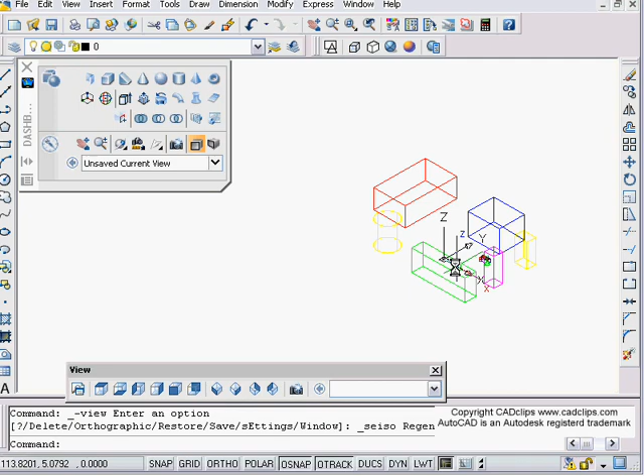I've just got some prop objects in here as I usually do. I'm going to switch over to conceptual view, for instance, and cameras are pretty easy. You just drop them in and look. The thing about a camera is it has a camera height and a target height, and then basically it looks in that direction, and we have clipping planes which we can turn on and off with our cameras.

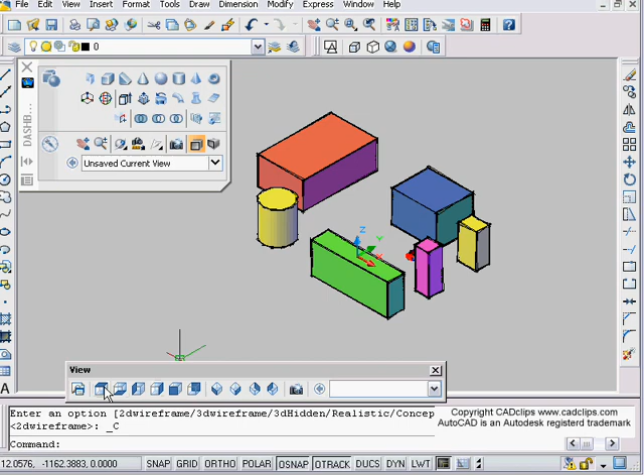I usually find setting myself to a plan view... oh, I've got a camera in there, I'm going to delete that. And I find, place them in a plan view to start with.

So I'm going to go in here and simply say camera. You'll notice that some of these have flyouts too here on the way. Camera. And then it says, okay, specify camera location. Notice that when you place the camera, it always looks back towards 0, 0.

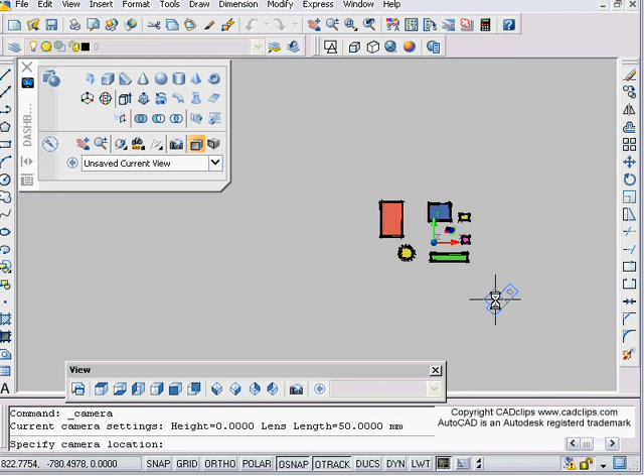You'll notice as I move this around, I'm going to move everything over to there. Okay, now my 0, 0 is here. Watch, when I place my camera, even though I'm going around these objects, it's always trying to look back at 0, 0, which isn't a big problem.

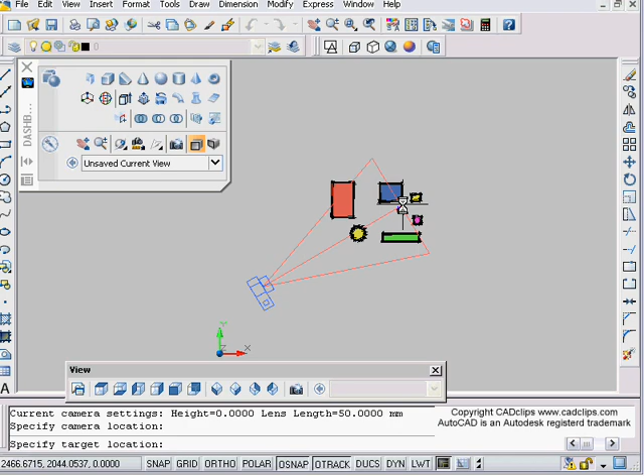Because we can still go over here and place our camera, and then we place the target. Now you have to be careful because when you use your object snaps, it'll pick up those endpoints and stuff like that. So be cognizant that it is picking up object snaps. So I'm going to just pick a point out here.

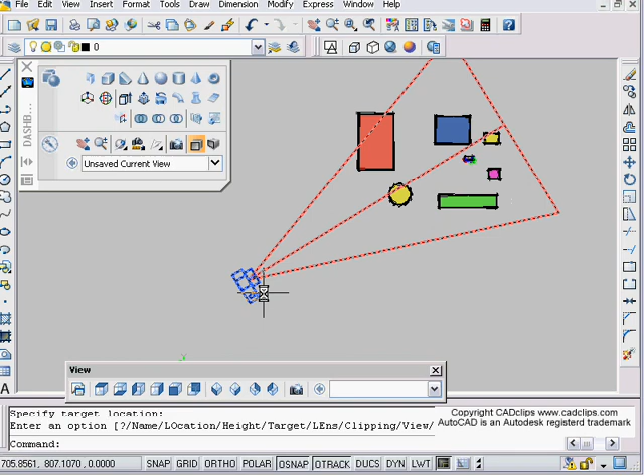And then it's going to leave me with some options inside of there, clipping planes, etc. And then I'm just going to hit enter. Now I have that camera on there, and down in here, if I hit this expand button down in here...

See some great stuff for recording animations and stuff. I can turn basically camera display on or off. So if I create a couple of different cameras around here...

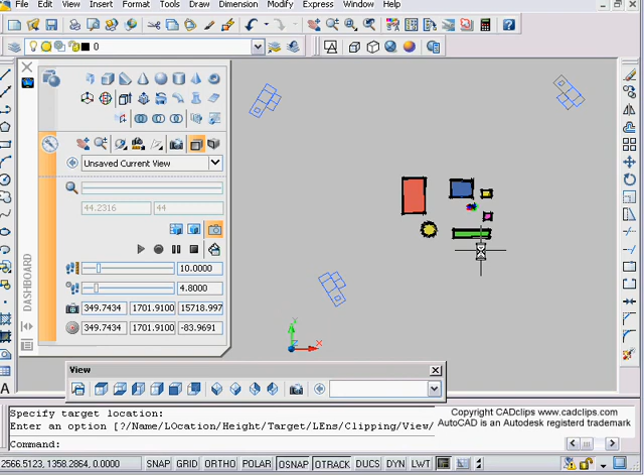Okay, I can turn those cameras on and off. Then I can click on the camera and it shows me a preview, and I can have that show or not show in there, and I can also pick my display visual style that I want in there.

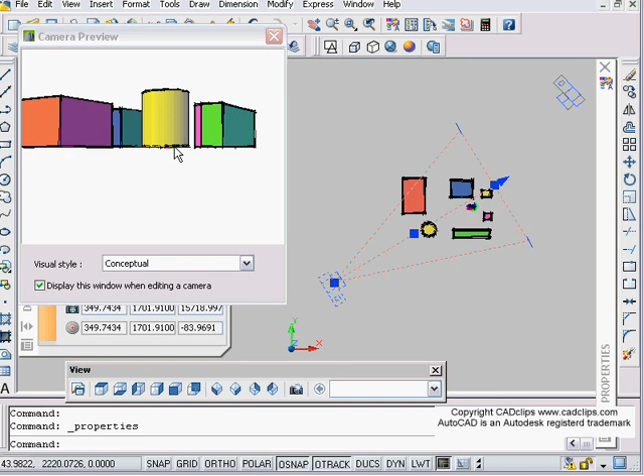The other thing is as you place cameras, it's creating views with names. You can click on a camera and check the properties of it, and it says, okay, this is camera 1. Now notice the camera Z and the target Z. That's why you're always kind of looking down at the ground.

So the first thing I usually do with a camera is click on it and check the properties, and I usually bump up, like maybe I'll take the target Z and put it at 10 units high, and you'll have to know what units are relative.

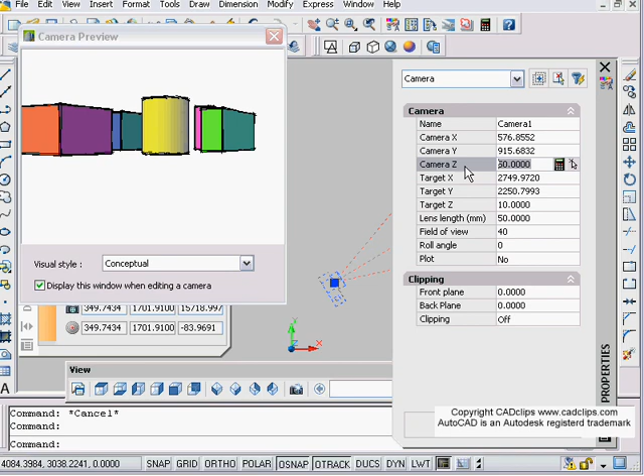And my camera I'm going to put at maybe 50 units high, which kind of raises it up, and you can see the preview. So I'm going to go back and maybe I'll make that 500 units. You'll see that that angle changes.

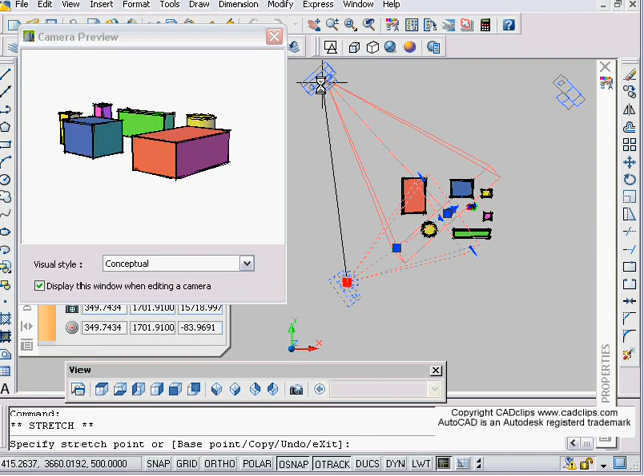Now as I go in here, I can click on this, and you can see the preview happening in the bird's eye. Well, maybe I want to bring that target there, and then I can work my way around the objects over here, and you can see that quite nicely.

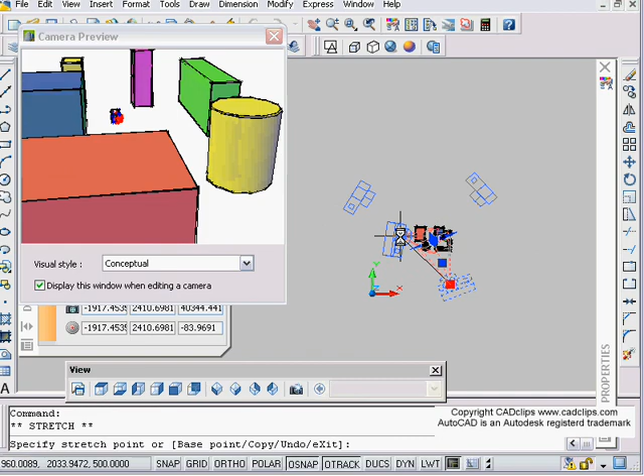You can get right inside, and depending on where your target is, depends on what you'll see when you get inside there. Hit it, and then I can even hit escape, do a regen, and then maybe zoom out and then click on here, and depending on how far you're zoomed out or zoomed in, you can have that picture in picture.

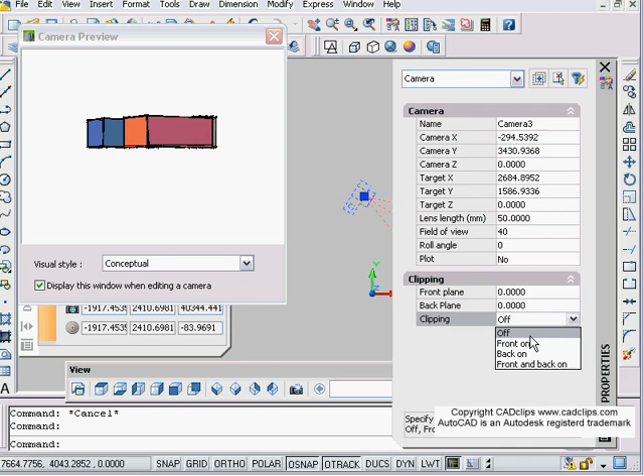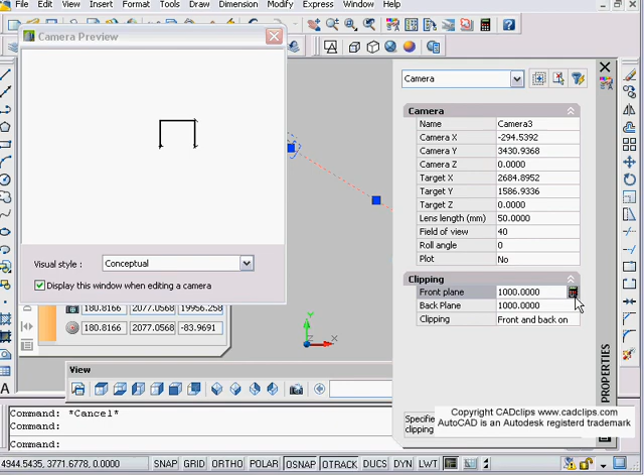So what happens there is we can click on that camera now, and we can set those clipping planes to be a certain distance away, by adding in some numbers, 500 and 1000. It'll capture part of that. You can go in and use your calculator as well. So you can add those clipping planes, a front clipping plane is the front one, and the back clipping plane is the back.

You can control those through the properties or with grips if clipping is actually turned on. Most times clipping is turned off, so it's kind of ignored.

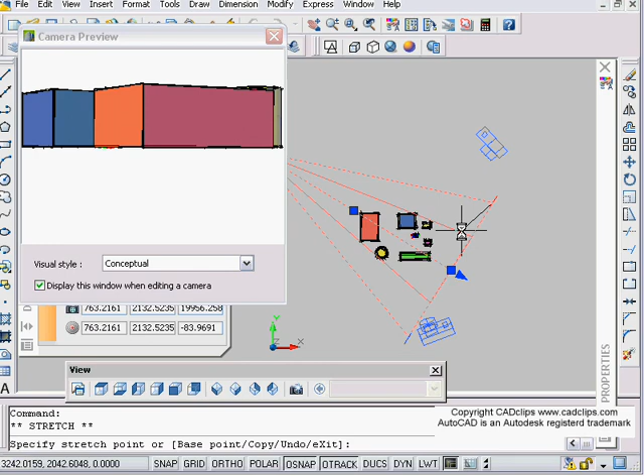Okay, we also have some grips over here. Lens length, if you want to narrow the scope of your lens as you're moving that around with your camera. Notice how this one still has a camera height of 0.

Let's change that to be 500 again. Let's make it 1,000 units high. Now I can move that around, etc.

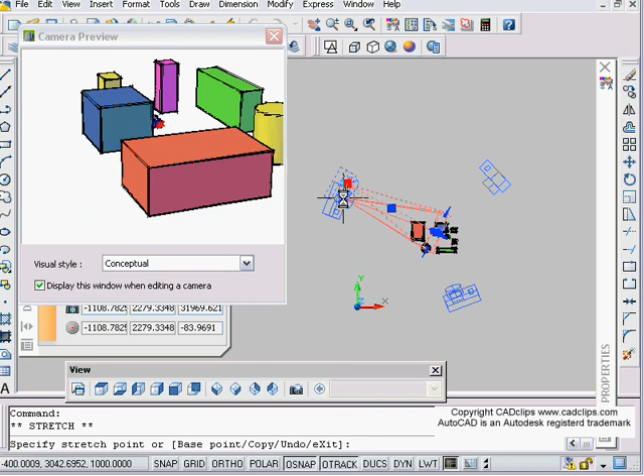And those cameras also show up if you look in these type of views. You can see that camera again. You can kind of move that around, do stuff with it. The square grip actually moves the camera.

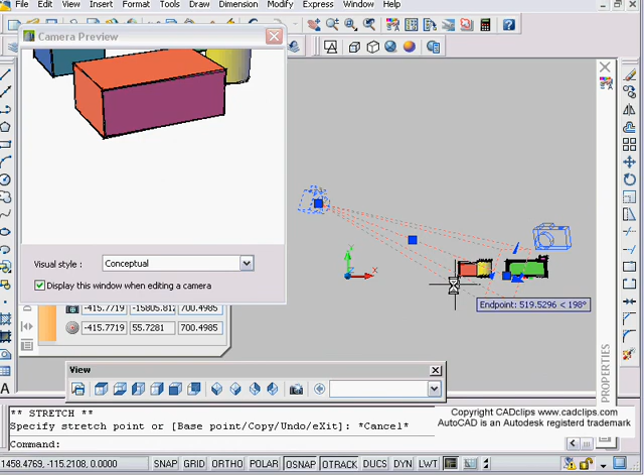These change the lens size by going in and out this way, and then this moves the target, the actual target. So get used to the different grips, and as you change your viewpoints here, you'll be able to see those cameras if they're actually turned on.

So the idea is to get one of your cameras, and if we right click on that, we can say set camera view, and then it'll actually go to that view, and you don't maybe need this guy over here anymore.

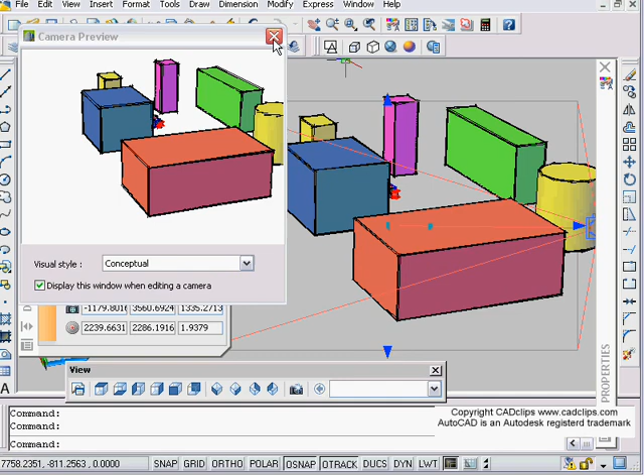And when you do that, you can then go in and pick on these points again and change those options for that particular camera.

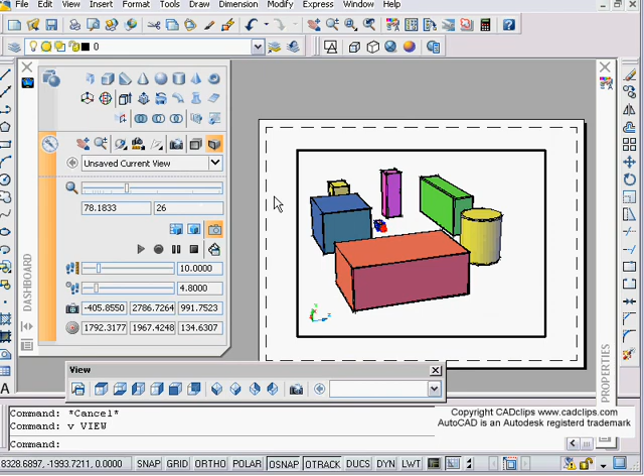As well, if you go into Paperspace and we make a viewport inside of here, we can type V for view, and you can say I want this to be camera 2, or I want it to be camera 3, or I want it to be camera 1. Each viewport can have a different camera view.

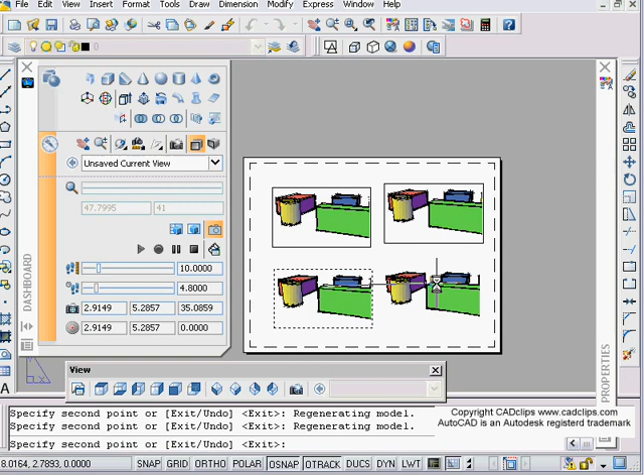So we can zoom that down and go in there and do what we want with that. And then we can maybe copy that viewport around, doesn't matter, in our Paperspace.

And then the idea, of course, inside of here is we say, click in here and set that one to be camera 1, and set this one to be camera 2. This one is camera 3, or we can set it to be whatever view we want.

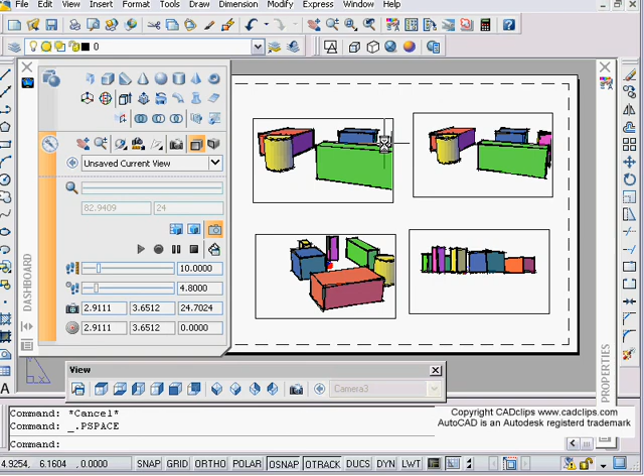So that's what we can do, and then we can name those cameras accordingly by going back into our Paperspace, as long as our cameras are turned on, and select that camera, and then check the properties, the name, X, Y, and Z. Mainly it's the Z's you want to be able to change inside of here.

And then it also, I believe, looks like it's being relative to the UCS or something inside of here. So try playing with these numbers. A lot of this stuff here also happens when you change these grips. You'll notice that these numbers in here start to change.

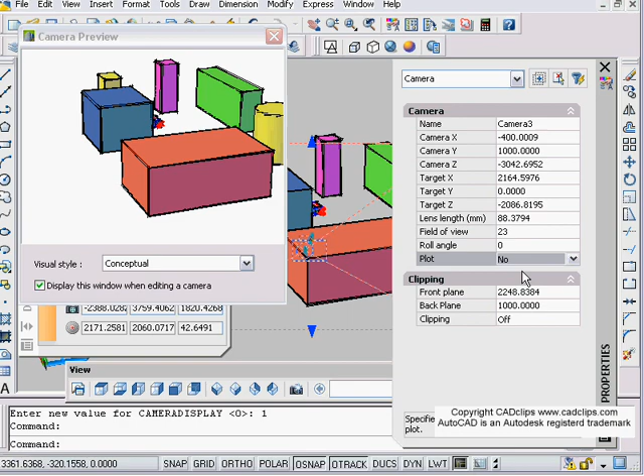It also appears there's a plot button, yes or no, so I would think that it would either be plotting the camera or not plotting the camera, and we'll see some more stuff with animation, etc. in the near future. So there's just a couple of tips on getting cameras in.

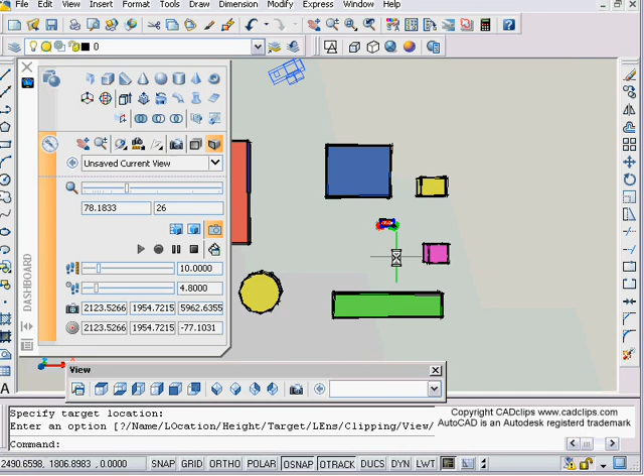Pretty straightforward. Pick the camera tool, pick a point, place it, and then have a look maybe at the help menu and set some more options. Basically, I just place it, and then after you set it, notice your Z, change your Zs, etc.

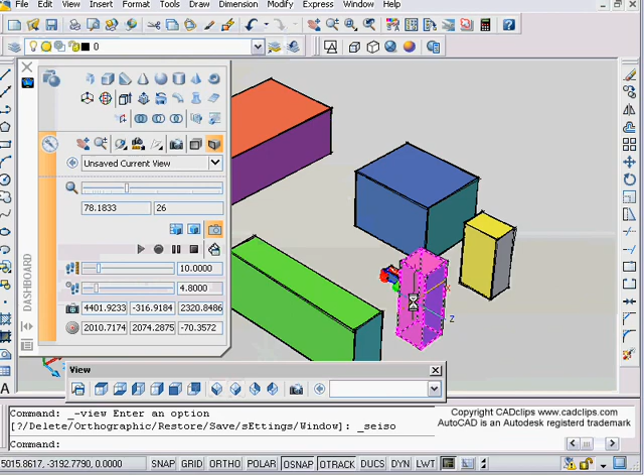You could also go in here and move the camera just by going into, for instance, let's go to my right hand side view, and I can grab that camera, and I can also move that camera up just by doing that, going into that view. Going back to my 3D view, click in here, so off you go.

So put your cameras in and then rename the views, and then take those views and put them in Paperspace and plot them out.